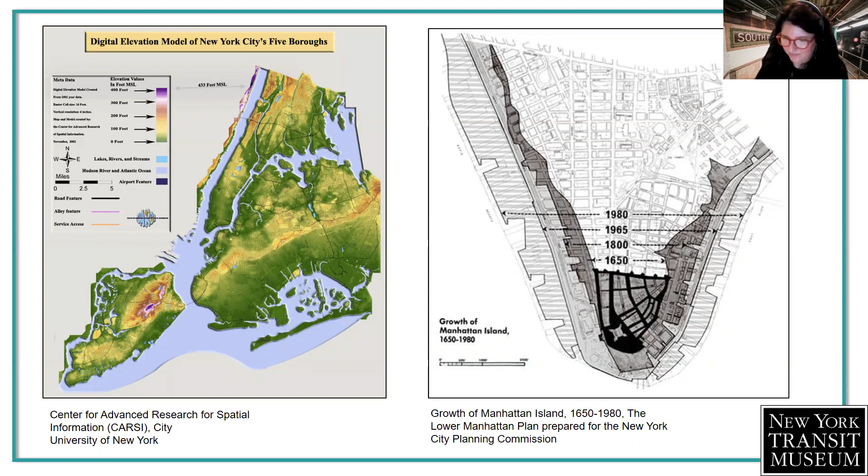It is the shape of this coastline that magnified the storm surge and made New York City even more vulnerable. The entrance to the harbor acted like a funnel. Waves slammed up against South Queens and Staten Island and into the harbor.

Then you have the second opening through the East River that connects to the Long Island Sound. Long Island Sound is shaped like a funnel, and as winds push the water towards Western Long Island, it heads up through the East River and into New York Harbor.

The storm surge generated by Sandy had a massive impact on the transportation system in New York City, particularly on the elements located underground and those close to the shoreline. The New York City transit infrastructure sustained more than $4.5 billion in damage.

The worst of Sandy's wrath was felt in Lower Manhattan, on Staten Island, in the Rockaways, and in Brooklyn at the Coney Island rail yards and maintenance facilities. Salt water from the storm surge poured into entrances, sidewalk grates, even manholes, and subway tunnels, stations, and rail yards were flooded.

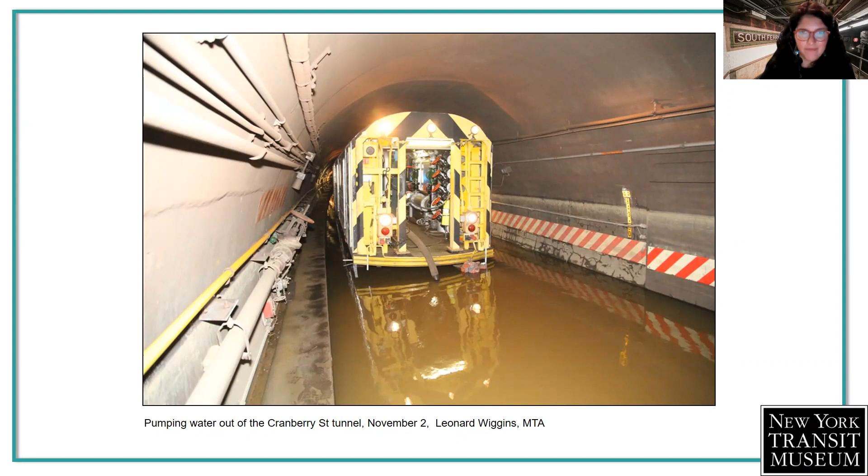One week after Sandy, many subway lines had been fully or partially restored, but some elements of the system remained closed for much longer. The subway opened with limited service two days after the storm and was running at 80% capacity within 5 days. Infrastructure repairs were staggered over several years, starting in 2013.

I see a question: where was the water pumped to? The pump trains pumped the water up to the street and into the sewers.

As I said, the impact hit throughout the system, but there were places where it was more extensive. In today's presentation, I'll be focusing on what occurred at the South Ferry station, the Canarsie tunnel, and finally the Coney Island yard.

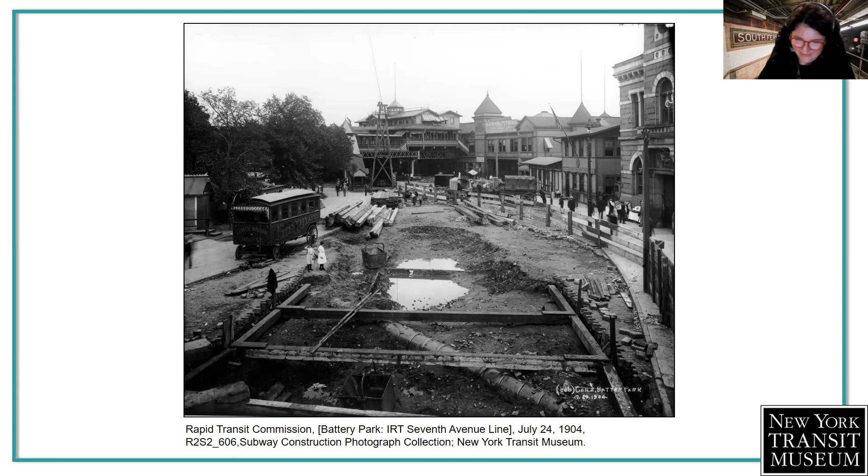So to exit the train at South Ferry, passengers had to move to the first 5 cars to exit. The conductor would announce to passengers at previous stops: to exit the train at South Ferry, you must be in the first 5 cars of the train, in front of the conductor's position.

So like the City Hall station, it could not be extended, but unlike City Hall, it was too vital of a station to close down, as there were not alternative stations nearby to give commuters that connection to South Ferry, the Staten Island Ferry, that they needed.

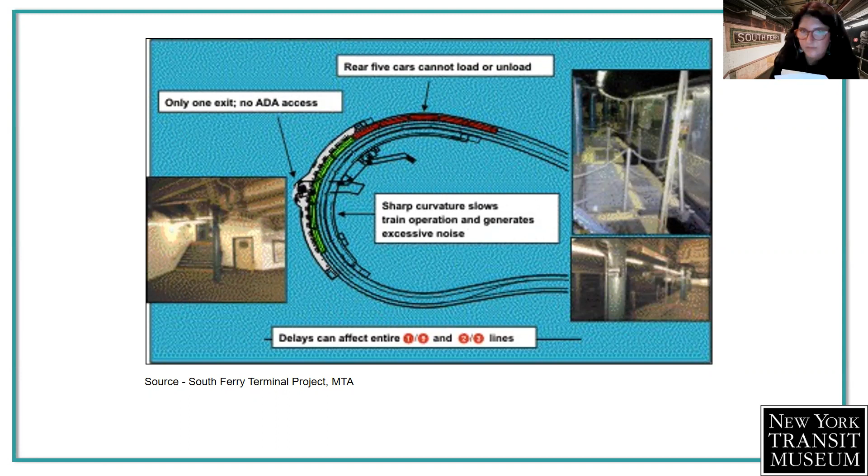So here we can see that they needed these platform extenders to reach those center doors and not have that dangerous gap in the platform.

And it was built beneath the original station. It was opened as a complex, providing a connection between the Broadway 7th Avenue 1 train and the Broadway lines N, R, and W trains, originally built by the BMT.

So the new station also had a better connection to the Staten Island Ferry, and it reduced the noise — as you were mentioning, we don't have that very loud screech around the curve with this new station.

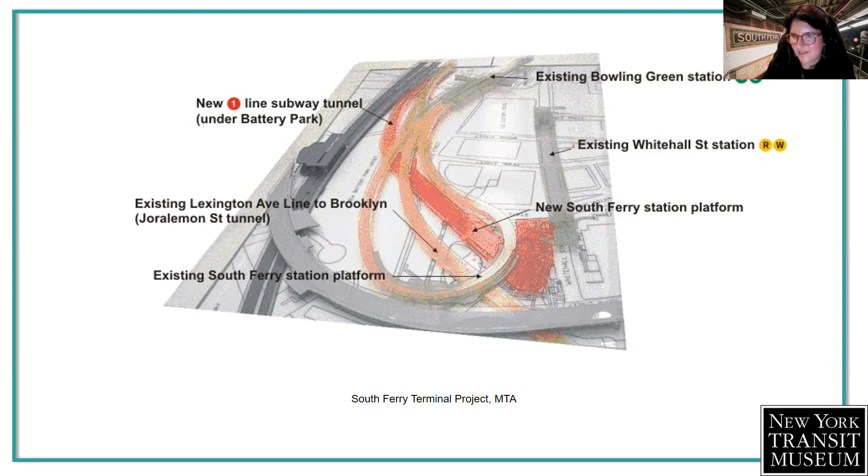Despite the MTA's efforts to barricade the station entrances and ventilation grates before the storm, when the storm surge hit, water poured down the stairs and filled the station from track level to the mezzanine. In total, Sandy brought 15 million gallons of corrosive salt water into the South Ferry complex, carrying thousands of pounds of debris.

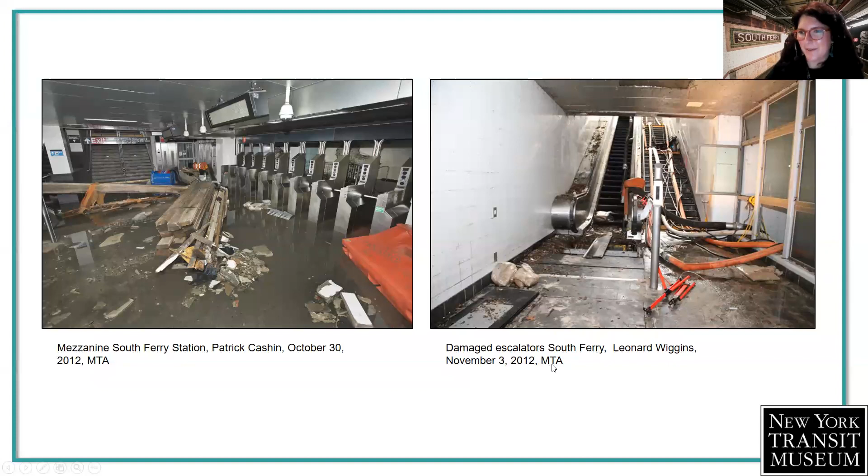Here we can see up on the mezzanine by the turnstiles, the water all the way up there, as well as chunks of tile and who knows what else that was carried in. In this picture on the right, we see an escalator, which I'm assuming sustained even more damage than we can tell from the photo.

When the water was finally pumped out and drained, the extent of the problem became clear, and the station was inoperable indefinitely. Damage had been sustained by both the structural elements of the station and the electrical system. Tiles had been ripped off the walls, plaster and paint hung from ceilings, turnstiles and other MetroCard equipment suffered extensive damage, escalators were damaged, and other electrical equipment was destroyed.

Equipment was not only submerged, but evidence of corrosion from the salt water was apparent. Signals, which keep trains a safe distance apart, were destroyed, along with switches, which connect the station's two tracks to each other so trains can enter and leave from either side of the center platform.

Crews removed hundreds of relays—electromagnetic devices that let the system know where trains are within 1,000-foot sections of track. They tried to clean these, but they had been damaged by the corrosive salt water and instead needed to be replaced. This station needed to be completely reconstructed, at a cost of $343.9 million.

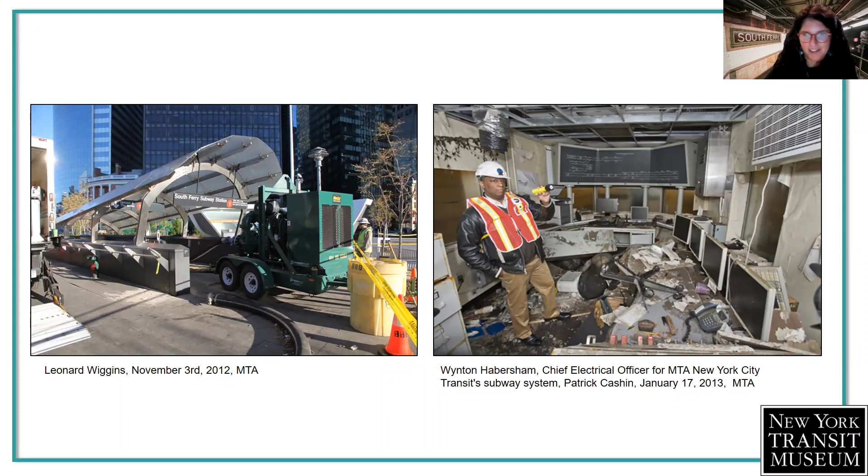So what's old is new again. Five months after Superstorm Sandy, the MTA reopened the original South Ferry loop station. While there had been some damage to this station as well, one of the biggest challenges in getting it running again was reinstalling those mechanical gap fillers we saw earlier, since they had been removed from the station. Additionally, a connection between this and the South Ferry Whitehall R/W station needed to be added.

The station had been decommissioned when the new one opened, meaning this was the first instance of a decommissioned station ever returning to passenger use.

The MTA set to work rebuilding the South Ferry station and protecting it and other vulnerable stations from future storms. They came up with a few new solutions to prevent water intrusion besides just the plywood and sandbags that had been installed before Sandy.

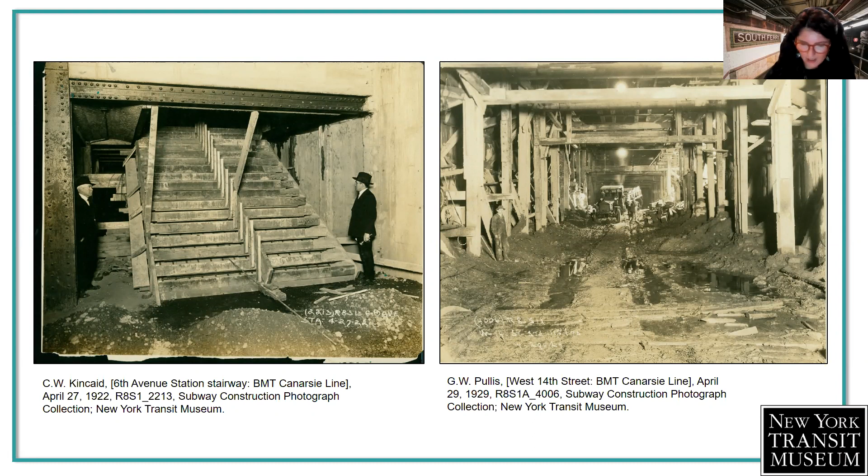The tunnel under the East River, constructed in 1924, consists of 2 tubes made of cast iron and lined with concrete, which travel under the East River between Manhattan and Brooklyn. In 1928, it was extended east to Broadway Junction, and in 1931, it was extended west 2 blocks to 8th Avenue in Manhattan, connecting to the IND 8th Avenue line.

The number of people using the L has grown drastically in recent decades, with ridership tripling since the 1990s. During peak times, 40 trains an hour pass through the Canarsie Tunnel. On average, each weekday, 400,000 riders were using the L train, and 225,000 of these riders used the Canarsie Tunnel between Brooklyn and Manhattan.

A feature of the Canarsie line is that it is one of 2 NYC subway lines that do not share trackage with other services. Because of this, it was chosen to be the first line equipped with communications-based train control, CBTC. CBTC was rolled out across the whole L line by 2011.

CBTC uses radio waves to pinpoint exactly where the trains are, a big improvement on the block signaling system, where we can only detect where the train is within a block, a set piece of track, rather than its exact location. This meant that only one train could be allowed into a block, whereas knowing exactly where each train is makes it possible to run trains closer together and increase capacity, better serving the growing part of the city that the L line was serving. Unfortunately, it was this new signal system that was severely damaged during Superstorm Sandy.

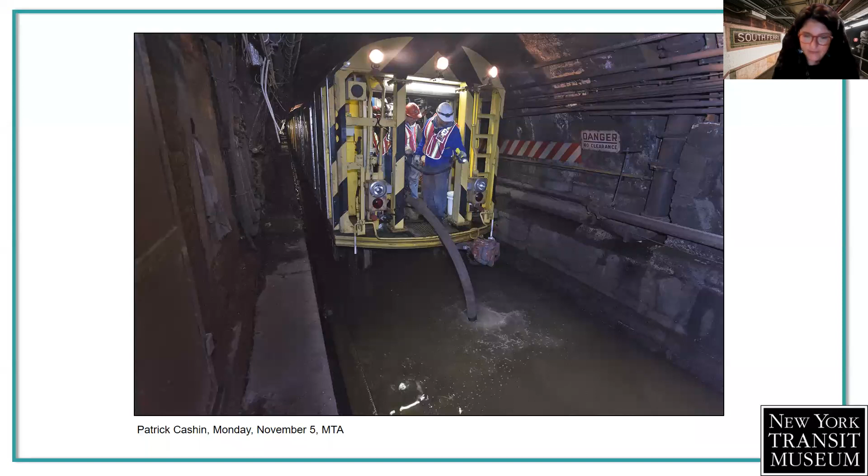During Superstorm Sandy, the Canarsie Tunnel was filled with 7 million gallons of corrosive salt water, which flooded in from the East River. This photo shows activity on Monday, November 5th, as MTA employees are using a pump train to pump seawater out of the L train's tunnel under the East River.

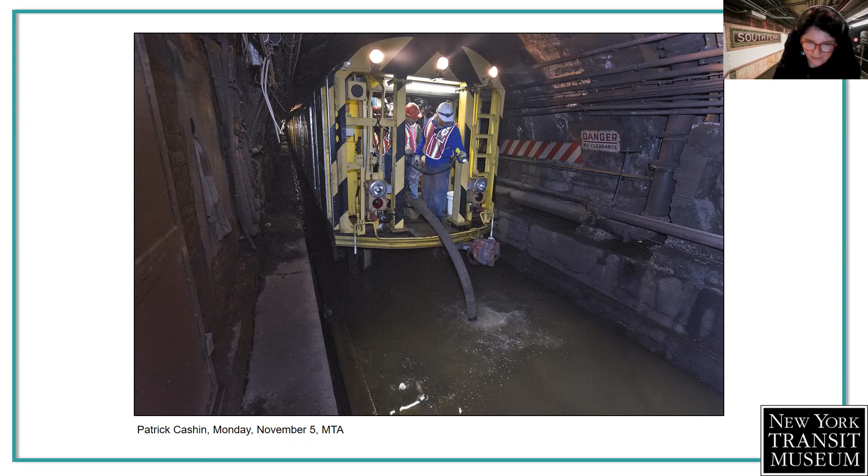Salt water damaged the tube structure, the tracks and ties, and signals and other electrical equipment. The worst damage was to the duct bank, which are concrete tunnels located in the bench wall. So the bench wall is this kind of spot here where you could walk.

These provide a protected pathway for the miles of cables and circuits necessary for communications, power, and the safety of trains. Salt water flooded into the duct banks and silt dried out inside of the structure, hardening like cement and destabilizing the duct bank from within.

It was originally thought that the L train would have to be closed completely in order to undertake the repairs. People started to move away from their apartments near the L line. It was very seriously thought that the whole thing would need to be shut down.

But following advice from Cornell and Columbia engineers working with the MTA, it was announced by the governor in January 2019 that the shutdown would not be a full-time closure, but rather a disruption to service on nights and weekends.

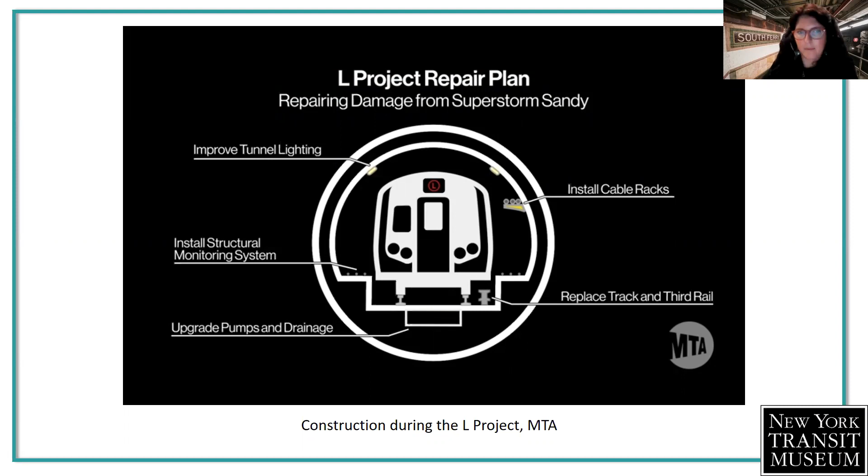To monitor the Canarsie tunnel's interior, smart fiber optic sensor cables were installed along the bench wall to detect small shifts or cracks. There was also improved lighting and construction of 3 new power substations, upgrades to stations along the line with wider staircases, more turnstiles, new escalators and elevators, making many of the stations ADA compliant.

Here you can see images of the work in progress, and the work was finished in April 2020.

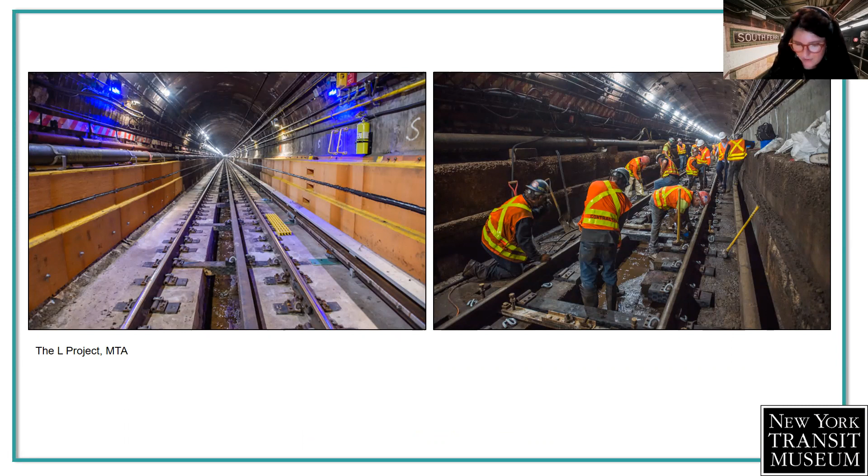All right, so for the final part of our talk, we will look at the Coney Island Yard. The Coney Island Yard is one of 24 rail yards operated by the New York City Transit Authority.

This facility supports a large car maintenance, inspection, and overhaul program, as well as being the largest car storage facility in the system. The Coney Island complex is the largest rapid transit yard in the state of New York and one of the largest in North America.

Located in Brooklyn, it covers 74 acres and operates 24/7. The yard stores and services 881 subway cars and deploys 71 trains into daily service across 6 lines.

While regular maintenance is performed by 13 different maintenance shops throughout the system, heavy maintenance or overhauls of the 6,500 cars in the system are done at the 207th Street Yard for the A Division and the Coney Island Overhaul Shop, which serves the B Division. This is a focus on preventative maintenance, known as the Scheduled Maintenance System, or SMS. Every car is rebuilt every 6 years, handling repairs out of the scope of the 13 maintenance shops. With this system in place, at any time each subway car is at most 6 years from its latest rebuild.

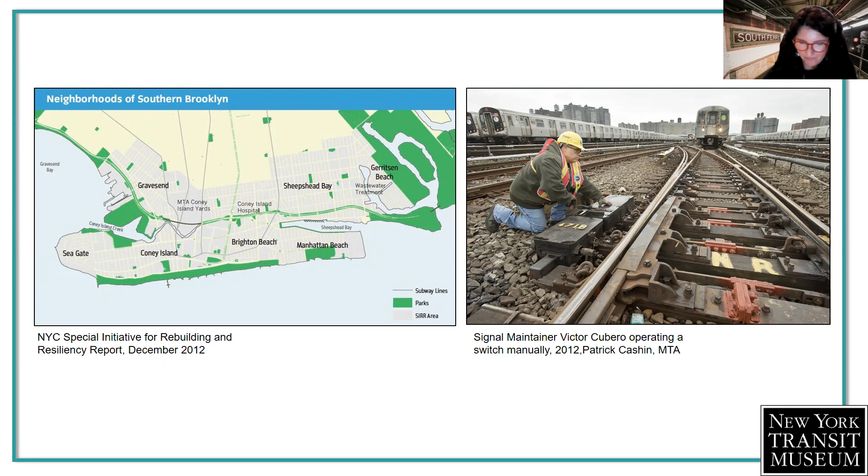The yard is in a flood zone and vulnerable to water flowing from nearby Coney Island Creek. During Superstorm Sandy, the storm surge caused the creek to flood and inundate the yard complex with over 27 million gallons of salt water and debris. While subway cars had been moved to higher ground, the salt water and debris quickly inundated the tracks, switches, motors, and signal equipment. The storm left the track switching operation at the maintenance and storage facility unable to be controlled remotely. Individual switches had to be hand thrown because the capability of operating from the tower was completely wiped out. Changing switch positions is necessary on the maintenance side of the house in order to send trains in and out of the barn. Water was pumped out, switches and signals were eventually repaired or replaced, and they got trains running again after the storm.

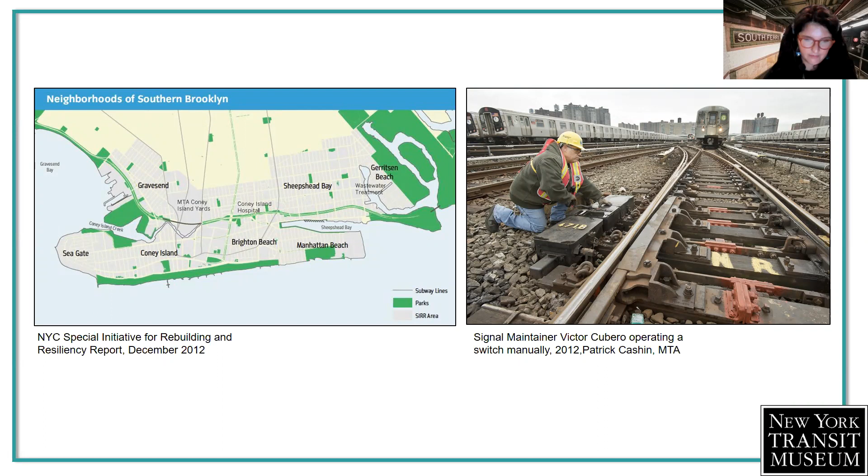Since Sandy, the MTA has been working to protect the yard and all that it holds against severe weather with an ongoing resiliency project. Here you can see they've installed a flood wall around the yard, 12,000 feet long, 14 feet high, and 30 feet below the ground. They replaced existing switches with new submersible switches in 2 locations, making switches that were waterproof and could be submerged in water. They also improved the drainage system beneath the yard, and installed debris shields on the bridge that crosses Coney Island Creek.

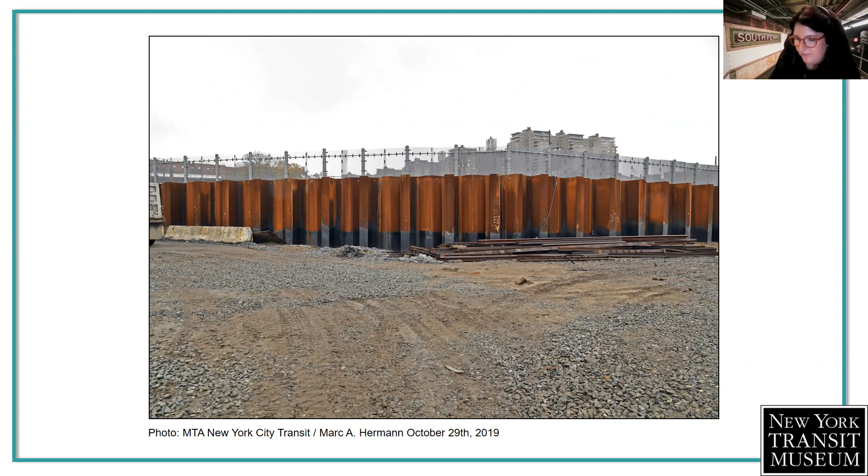On the 7th anniversary of Sandy in 2019, the MTA announced it had reached a resiliency milestone with construction of a state-of-the-art elevated cable bridge, 4,280 feet long, to carry power, feeder, and communication cables across the yard. Raising that equipment up into the bridge rather than having it run along the ground means it is safer from flooding, and it also makes them easier to maintain in addition to protecting them from weather.

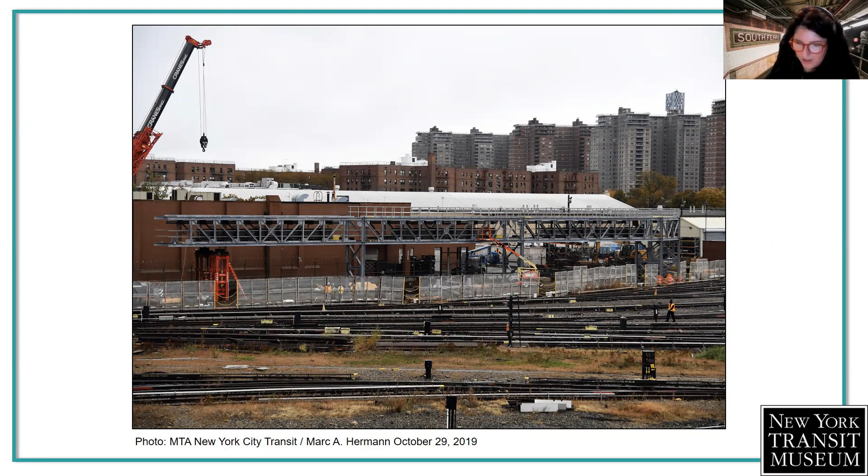The bulk of the Coney Island Yard resiliency work is slated to be completed by the end of this year. The threat of climate change to the MTA remains, with so much waterfront and flood-prone infrastructure above and below the ground. This has been recognized by the MTA, acknowledging that as the weather becomes more extreme, it is going to be a continuing effort into the future. Since Sandy, the MTA has focused on preventative measures to protect against another storm, and billions has been spent to restore and fortify infrastructure and to incorporate resiliency into every project.

The MTA recognizes that it is not a matter of if, but when another storm will hit. Whether the subway is prepared for this next huge storm, we'll have to wait and see, but it certainly will be more well prepared than it was for the last storm.